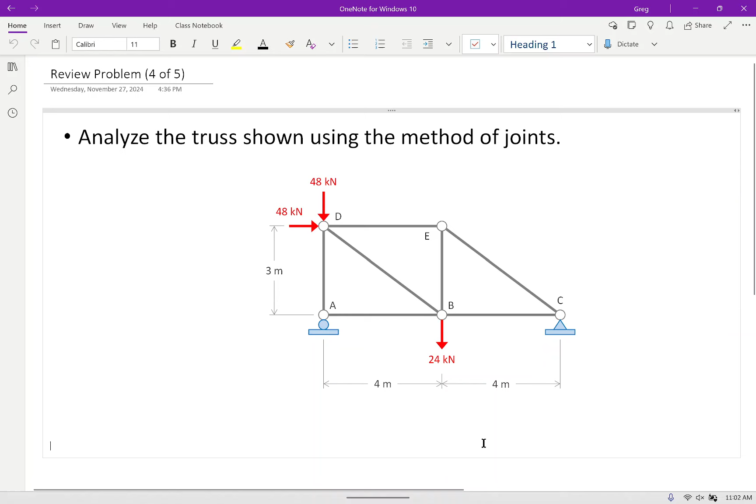So this is problem number 4. We've already done the first 3. Any questions about the last 3 problems? We had the particle statics problem, we had the centroid, and between that we had the big 3D cross product problem. Sound good?

Okay, so with this problem we have a truss. I picked this truss because it's a pretty standard truss, but there is one result that is kind of interesting, so I want to make sure we're all on the same page. I have the truss here on the board as well. I want to make sure we're clear on strategy. I did tell you to solve the truss using the method of joints with this problem, but let's make sure we understand our strategy.

What is the first thing that we need to do in this problem? Reactions, exactly right. We've got to solve for the support reactions, because we have to solve for every member, right? So we're going to need them. And then the second part after that is the method of joints. Now, we're going to come back to this in terms of what is our order of solution, but for now, everybody should recognize that we need to solve for the reactions first.

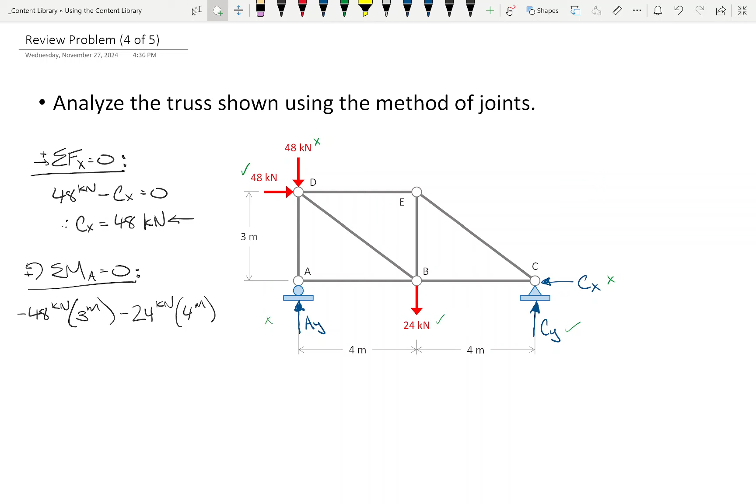Maybe what I'll do, let me move this down a little bit. And then we're going to have CY times what? I don't know why I drew those as exponents, but I'm just sort of going with it. All right, so we have 48 times 3. Let's see, 48 times 3, that's 120 and 24, or 144. Minus 144. Minus 96 plus CY times 8 is 0. So that's going to be CY times 8 meters equals what? So 144 and 96, that's going to be what? 240. And so we're going to get that, right? So there's that.

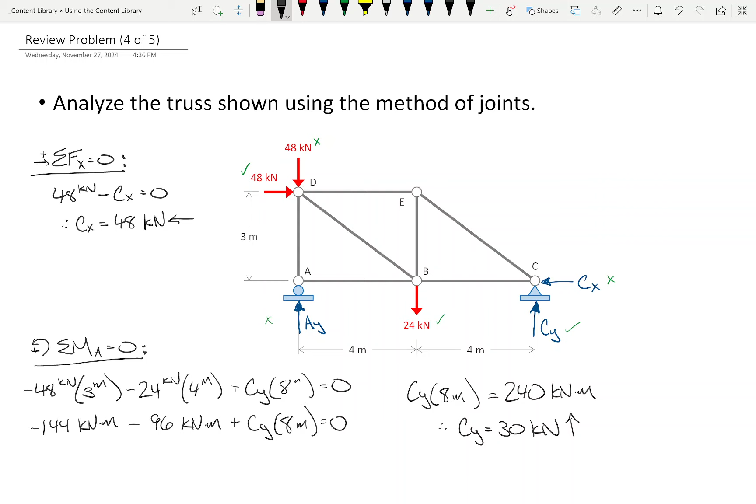So what's the last thing left to do? Solve for AY by summing forces in the Y direction. So what do we got? We've got AY going up, 24 going down, CY going up, 48 going down. So we'll say AY plus CY minus 24 minus 48. And so that's AY plus 30 minus 72. So that's going to be AY minus 42. And so, bam, bam, bam. And so this is 42.

Okay. I want to be clear, this part right here, I actually want to take a second and take a breath. Is there any part about this that was confusing? Because we're going to do reactions again on the next problem. And in fact, the computation of support reactions is one of the most ubiquitous topics in statics. So if you have a problem or there's something that you didn't understand here, this is the time to ask, okay? Because we are going to be doing this part quite a bit. Yes?

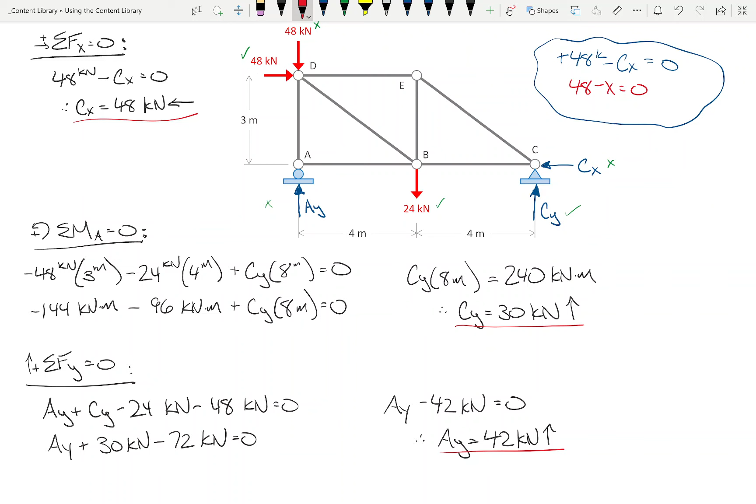Everybody good? This is good stuff, so don't hesitate if you have any questions. Okay. All right. So now what we need to do is solve this structure using the method of joints. Now, let's look here at the board. So obviously, I'm going to start with joint B, right?

That was a joke. Why would I not start my problem with joint B? There are too many unknowns. I cannot analyze a joint that has more than two unknowns. So a question would be, give me a joint that we ought to start this problem with. Well, hold on. How many unknowns do we have going through D? 1, 2, 3. We have 3 members going through D. So we could start with joint C.

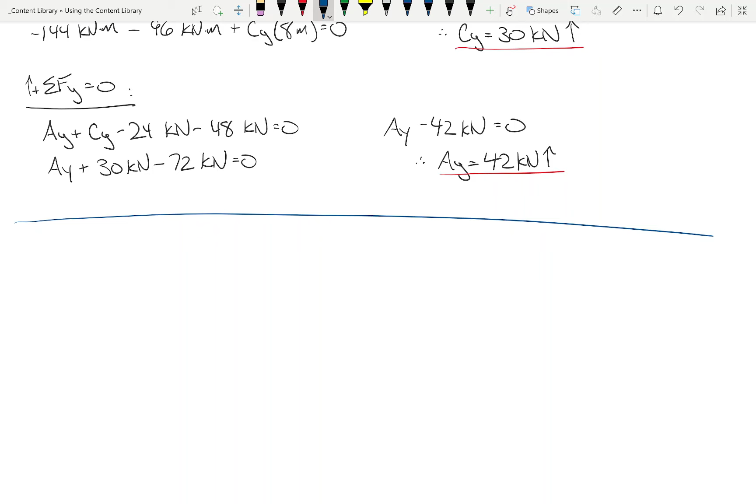What's another joint that we could start with? A, right? We can do joint C. We can do joint A. So what I'm going to do is say that we could start with C or A. I'm going to do C first, then A. I want to be clear that you could do either one in either order. It wouldn't matter. I'm doing C first and A because I have a point I want to make to you all. But it doesn't matter. So let's do joint C first.

By the way, for this truss, the diagonals are all at a 3 to 4 slope ratio? All the diagonals are 4 up 3, right? So all the diagonals are going to be 5, 4, and 3. The big thing to point out is the horizontal component is the bigger component. When we're dealing with the X and Y components, the horizontal component's bigger. Everybody okay with that? Okay. All right, so let's do joint C.

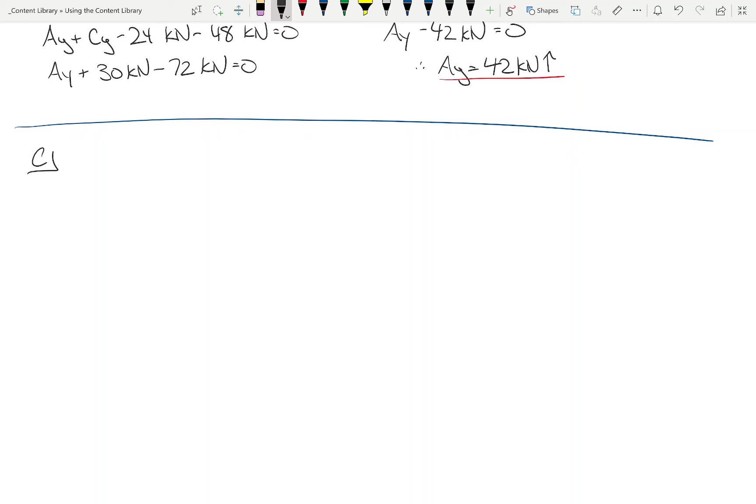So what do I do with joint C? The first thing I do is draw the members. The next thing I do is put my slope ratios down here. The next thing I do is list my reactions, which is why I wanted to put this here on the board so I wouldn't have to scroll up and down. I have 30 kilonewtons and I have 48 kilonewtons.

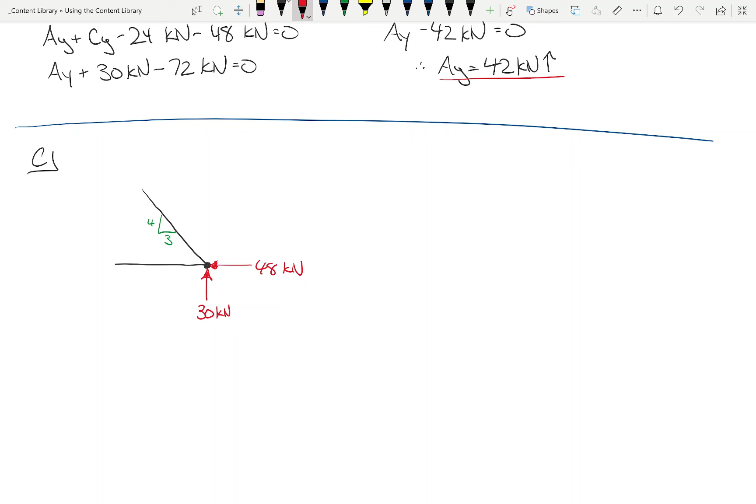Now, how many unknowns do I have now? Yes? Is the slope ratio supposed to be 4? Oh, you're right. Thank you. So we're going to have 2 unknowns over here for the diagonal, 1 unknown here. Okay? So let's name these. Let's call this BC. Let's call this CEY, CEX. So let's just see if we can do this.

All right, first off, before I go down the rabbit hole, is everybody comfortable with what I have here on the screen, and able to construct this on your own? Notice the systematic process. Look at what I did. I started off with the members. This is joint C, member, member. Slope ratios, 3 and 4. Next, what are the loads that are already on the joint? Here and here. And then the next thing I did is my unknowns. This is a horizontal, this has 1, a diagonal has 2. That's it. Is everybody okay with that?

All right, so now let's do some figuring. How many horizontal unknowns do I have? 2. How many vertical unknowns do I have? 1. So let's keep this real simple. What is the vertical one got to be? 30. 30 going down. If that's 30, what's the horizontal? Would that be 24 apiece? No.

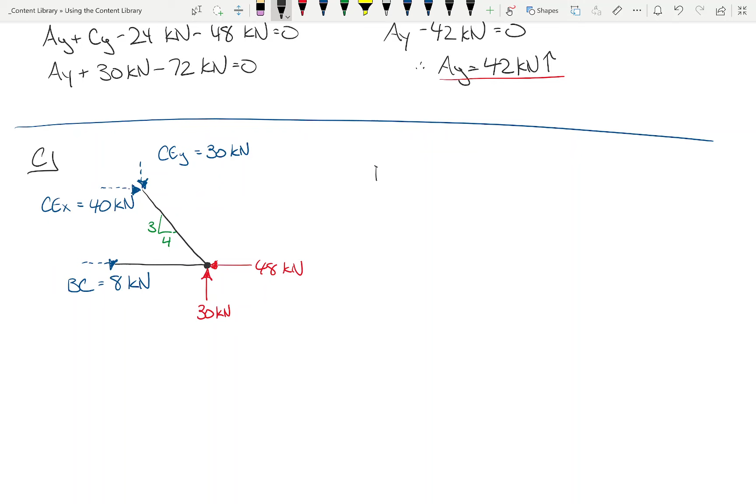So BC is 8 kilonewtons, and CE, how am I going to get CE? I'm going to use the Pythagorean theorem. When I use the Pythagorean theorem with 30 and 40, what am I going to get? 50.

Now, can somebody tell me about the direction of these forces? When I say direction, I mean like tension or compression. Compression, which one? Both of them are compression, right? Because both of the sets of arrows are all facing toward the joint. Is everybody okay with that? Is everybody okay with the fact that when I got this one vertical, I immediately put that one down, that one to the left? Everybody okay with that? So this is compression, this is compression.

So up here on my little diagram up here, that's what I'm going to do.

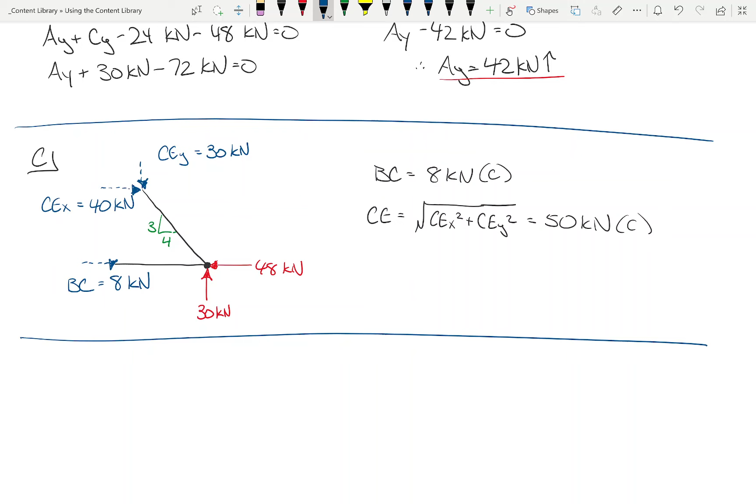All right, I want to take a breath and make sure we're all understanding what's going on, because I don't want to just barrel through this without y'all understanding it. Everybody good? Now, what was our plan? What do I do next? That was the plan, okay? This is important whenever you're doing these types of problems, is make sure you have a plan and go with it, okay? So now this is the joint that I said was going to have a weird, somewhat strange answer.

Okay, so again, everybody watch up here with me. So this is what I'm going to do. How many members do I have going through A? 2. I have a vertical and a horizontal. Do I have any diagonals? Do I have any loads that are applied directly to joint A? Exactly. I have a reaction of 42 kilonewtons. I am going to have an unknown in this member and an unknown in this member. So let's name them. Let's call this AD. Let's call this AB. Okay?

Let's deal with the verticals first. So if I have 42 going up, what does AD have to be? Going down. So this is 42 going down. And by the way, if I were to make a conclusion about member AD, is it tension or compression? Because it's towards the joint. So this is 42 kilonewtons in compression. But like I said, member AB is going to have a strange answer.

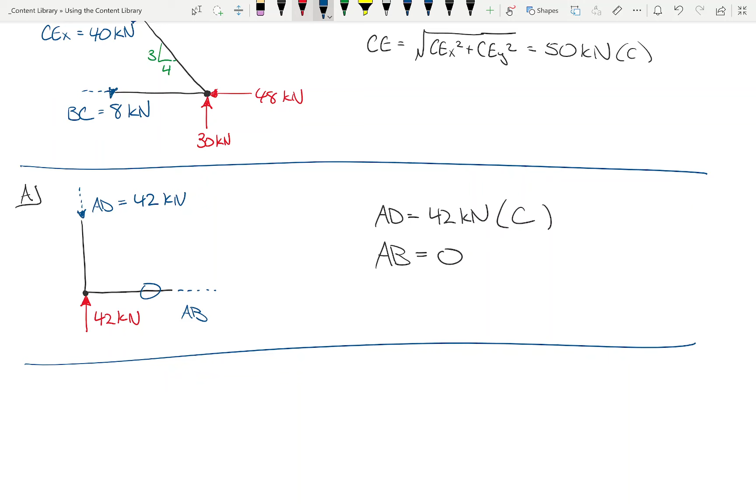I'm going to start knocking out the rest of this truss pretty quickly, if that's okay. What I'm going to suggest for moving forward is that we do joint E next. Now, why am I saying joint E? Well, joint E has 1, 2, 3 members, but we already know one of them, right? Okay. And then we're going to do joint B. And then afterwards, the truss is done. Okay. So I'm going to knock this out pretty quickly because I want to have some time for our final problem. So if we look at joint E,

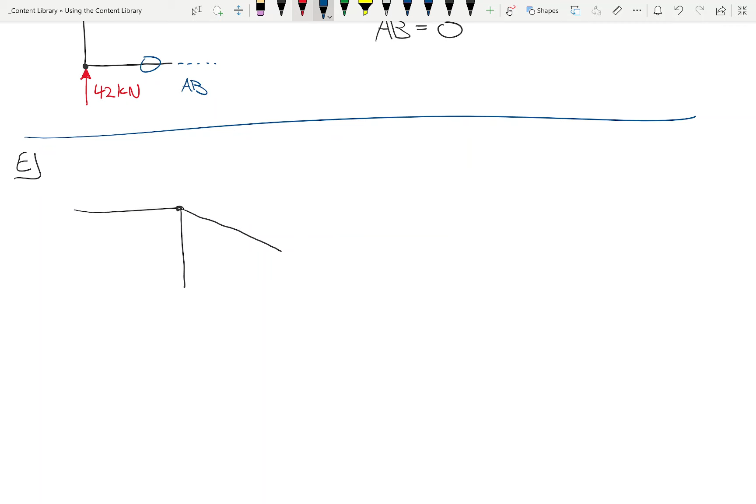so joint E looks like this and that. Are there any external loads applied to joint E? No, it's just the joint. But here's the thing. We already know the force inside this member. Right? Because remember, this is a 4 to 3 member, and we got this. Where did I get this, by the way? Where did I get the 30 and 40? From joint C. We had already done joint C, right?

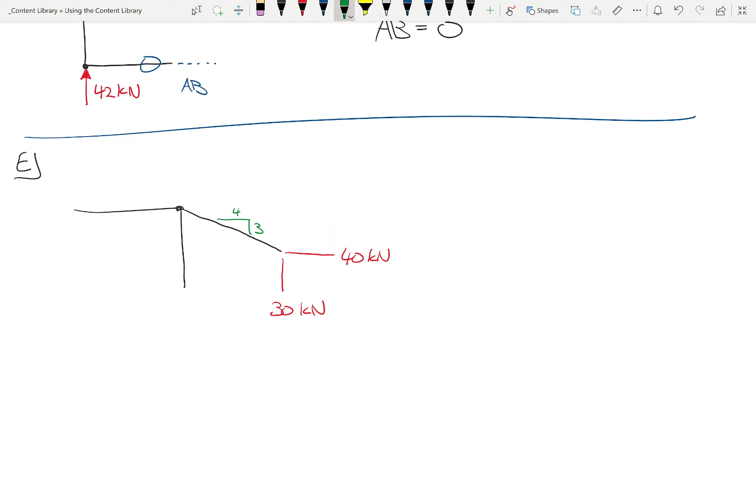Now, what I need to know is what direction do I draw the arrow? Which direction does the 30 kilonewton go? Up. Which direction does this go? Left. Why is it going up and to the left? It's going up and to the left because the member is in compression. Compressive forces face the joint. Okay? So, how do we deal with equilibrium? How many unknowns do we have? A vertical and a horizontal.

Okay? So this is going to have a single vertical component, single horizontal. We're going to name these. Let's call that BE. Let's call this DE. What is BE going to be? 30 kilonewton down. What is DE going to be? It'll be 40. And it's going to go like that, right? Make sense?

So that means that this is 40 in compression. This is 30 in tension. This is our first tensile member. There's a lot of compression members in this truss. But what's happening is a lot of the loads are sort of serving to push on the members. That's just what's happening. If we were to change the direction on some of these loads, it might change the answer.

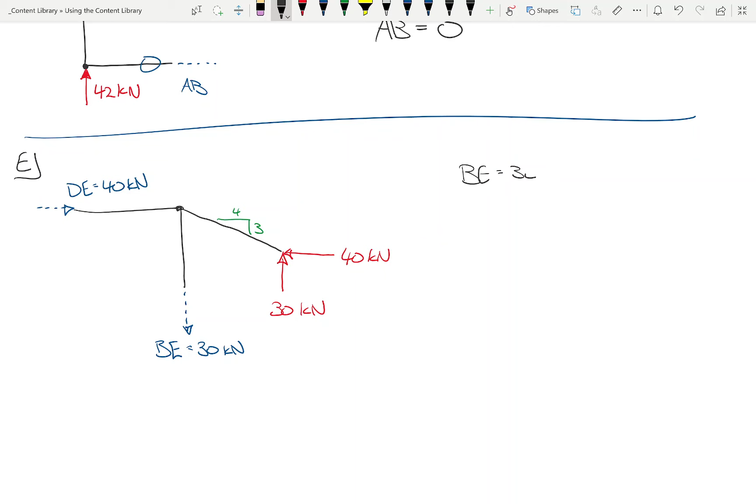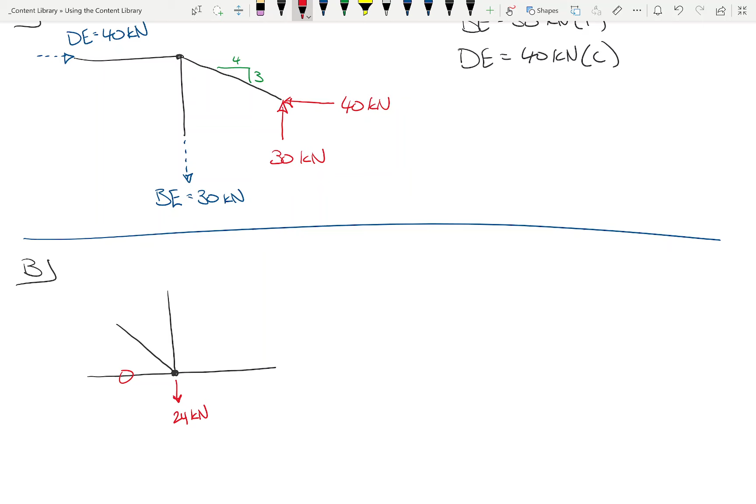And then lastly, we have joint B. Okay? So as you start getting further along in the truss analysis, it becomes a bookkeeping problem more than it becomes anything else. Okay? So there's the joint. Here's joint B, horizontal, horizontal, vertical, diagonal. Let's write the forces that we know. So this horizontal member here on the left, that's a zero force member. There's nothing going on in that member. Okay. This one is that, so that's 8 kilonewtons in compression. This vertical one is this, that's 30 kilonewtons in tension.

And so the only thing we have left is this and this. Okay. So here's the cool part. Let's just handle each one separately. What's the horizontal component got to be? No, the horizontal. 8, because this is 8 this way, so it's going to be 8 that way. So this is 8. What about the vertical? 6, right? Which direction? Down, because there's 30 up, but there's only 24 down. So there needs to be another 6 going down.

And by the way, what's the slope ratio on this member? 3 to 4, right? So does this 6 kilonewtons and 8 kilonewtons comport with this 3 to 4 slope ratio? Yes, it does, right? Because 3 is to 4 is 6 is to 8. Both values independently satisfy the slope ratio, and both values independently pointed the right way. So this is going to be BDY. And that's BDX. So BD. Now the question for you, and for the class, is that tension or compression? Compression.

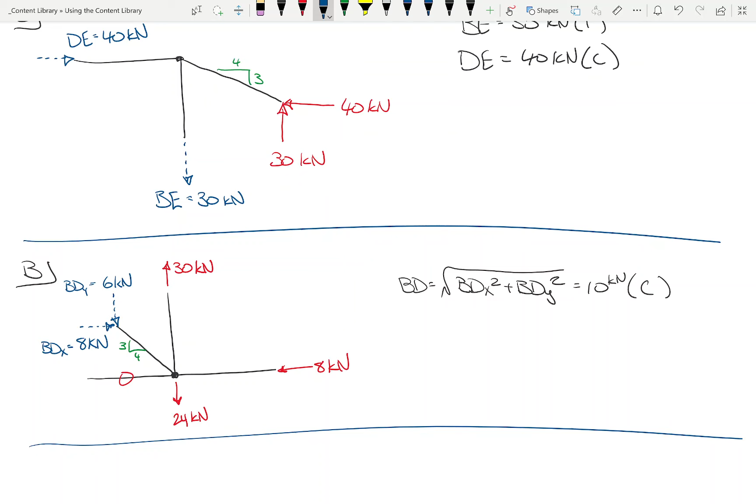Okay. All right, I want to give a little bit of time for our next and final problem, but before I do, does anybody have any questions? Okay. I think if I had to pick, this last one was my favorite problem to develop for this whole exercise.

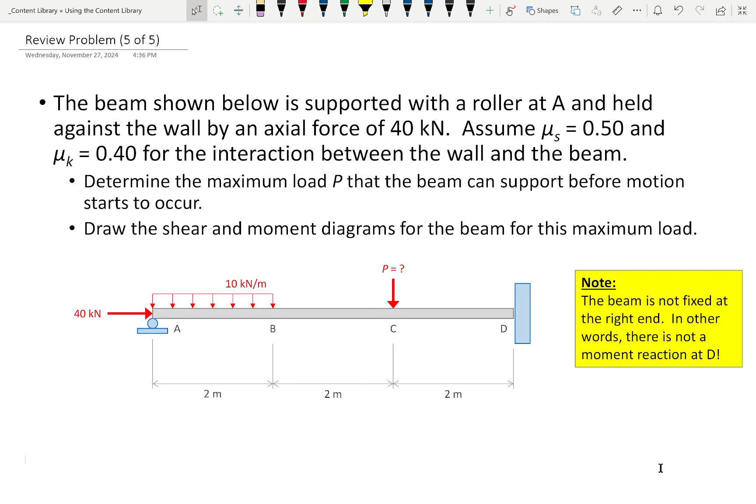Okay. So let's see if we can digest what's going on with this problem. I have here a beam that is being shoved up against a wall and it's being held in place on the wall by an axial force of 40 kilonewtons. I'm giving you some coefficients of friction for the interaction between the wall and the beam. I want to determine the maximum load that the beam can support before motion starts to occur, and then I want to draw shear and moment diagrams.

Okay. All right, so the big thing I want to point out is that the beam is not fixed over here at the right end. What's happening is, like this eraser is the beam, and I've got this 40 kilonewton load here that is pushing the beam on the wall. So what's happening here at the wall? If I take a 40 kilonewton load and it pushes against the wall right here, the wall's going to respond with a force like that, right?

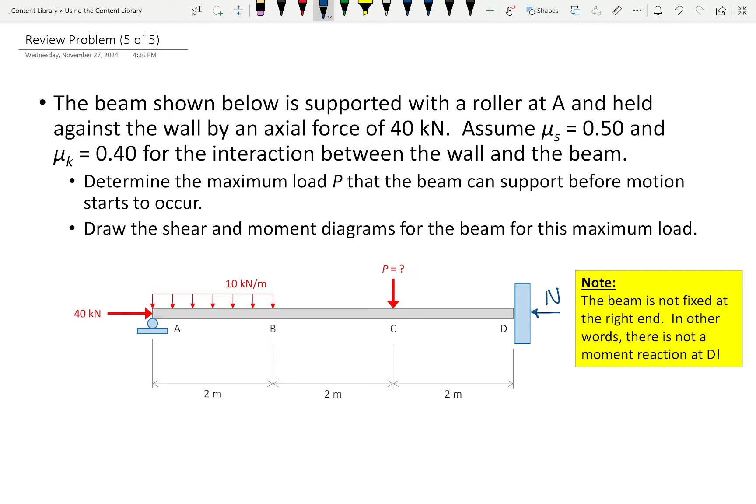Now what do you think we ought to name that force? We could call it Dx if you wanted, but I have a better name for that force. And I want to think about friction. That's the normal force, right? This is the normal force that the wall is going to respond with. And so if I were to sum forces, that's that.

Now, let's think about what's happening here. So, let's envision what's happening here. Here's the wall, and I'm pushing this against the wall, right? So I'm getting a normal force in response. And then I'm loading it this way, right? Now, if I'm loading it this way, the beam wants to slide down the wall, right? What's going to act against it?

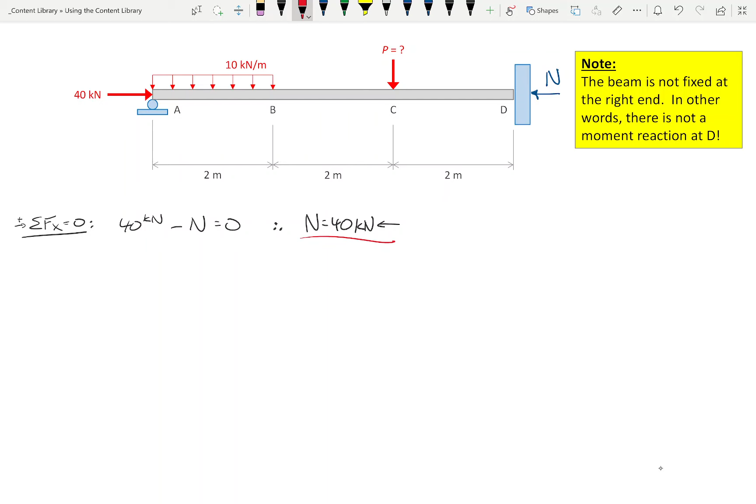Friction, right? So what I'm getting at is I've got a vertical reaction right here. Now I could call that reaction Dy, but I have a better name for that reaction. I'm going to call that reaction the resistive force, the frictional resistive force. That beam wants to slide down the wall, and that interaction between the beam and the wall is saying, I'm not going to let that happen. So I've got some friction trying to keep the beam up.

Now, what did the problem say? The problem said figure out what the maximum loads need to be before the beam starts to move. So how do I figure out what the maximum friction force can be before the beam starts to move? I would say I need to figure out this. And how do I calculate the F sub m? Remember, F sub m for friction, that is the force at which motion occurs. How do I do that? Mu sub s times the normal force, the coefficient of static friction times the normal force, right?

So what I'm saying is, under a normal force of 40 kilonewtons and a coefficient of static friction of 0.5, I have figured out what that reaction is. Does that make sense? If I push up against this beam and wall with a force of 40 kilonewtons and the coefficient of friction is 0.5, then it takes 20 kilonewtons before that beam starts moving, right? Does that make sense? Now, some of you are like, okay, but I don't see where the problem's going.

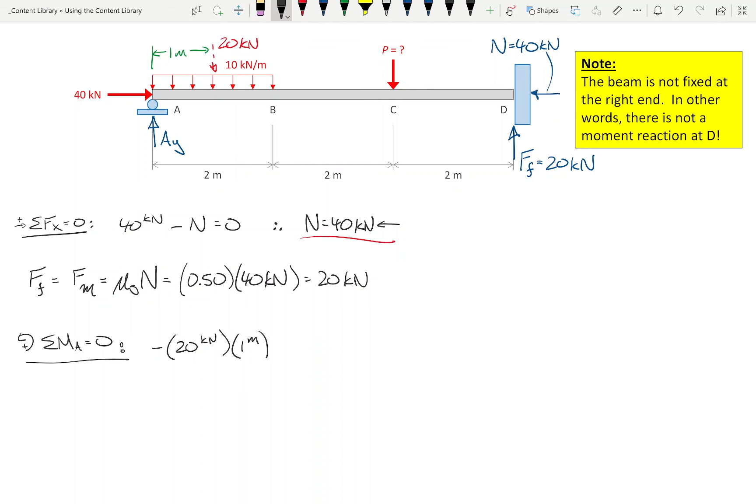Okay, what about the P? Does the P generate moment at A? At a moment arm of? Four meters, right? From A, right? It's 4 meters, not 2. All right, what about the N? Does the N generate moment at A? Goes right through A. What about the friction force? So we have a 40, which is going to be positive, times a moment arm of what? Oh, you're right, it's 20. That's going to equal 0, right?

Does that make sense? What's my unknown? P. So, let's see. Did I get the signs right? Yes, I did. So if I add the P over to the other side of the equal sign, I get 120 minus 20, or 100.

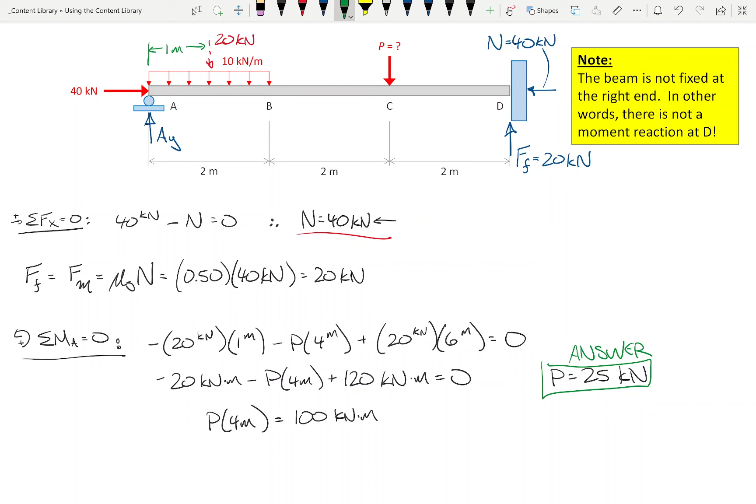And what did the problem say? The problem said figure out what load will cause motion to occur, right? Think about this. What would happen if P is a little bit larger? If P is a little bit larger, then F sub F has to be a little bit larger to keep the beam in equilibrium. But that's not possible because that is the maximum amount of force that we can generate there before motion starts to occur. Does that make sense? We can't get any more. So that's the answer. Then what's left to do is to draw the shear and moment diagram.

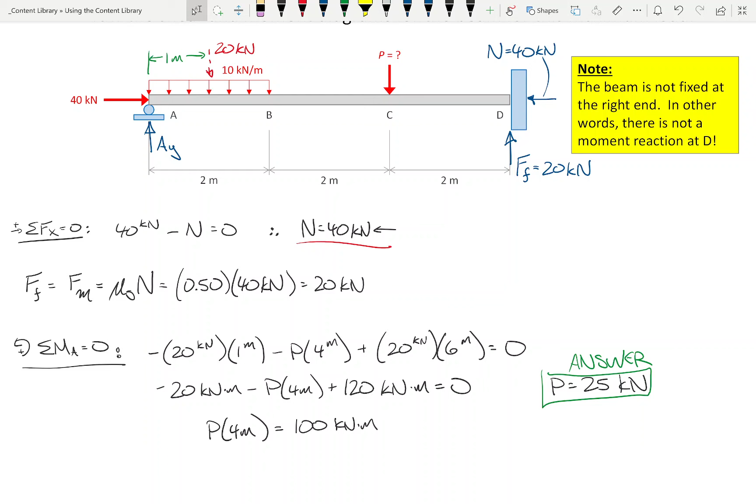So I ask you, if I want to draw the shear and moment diagram, how do I do that? Well, what do I need to do? I need AY. I need to get my other reaction. So I need to sum forces in the y direction. So I've got AY going up. I've got FF going up. Are you counting the distributed load in this? Oh, no, I am, yes.

And then, so these are the forces going up. What's going down? I've got the 20 kilonewtons, and I've got P going down, right? That's what I've got going up. That's what I've got going down. The 20s are going to cancel, okay? And what am I going to get? AY minus P equals 0, so what's AY? 25 kilonewtons going up. Okay. Does that make sense?

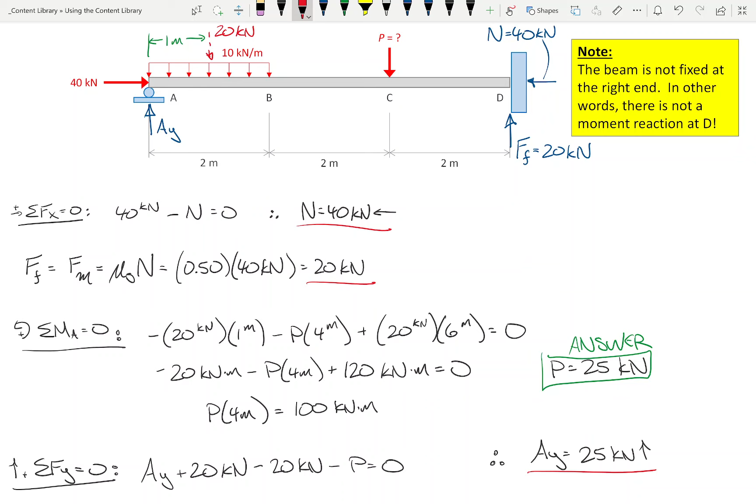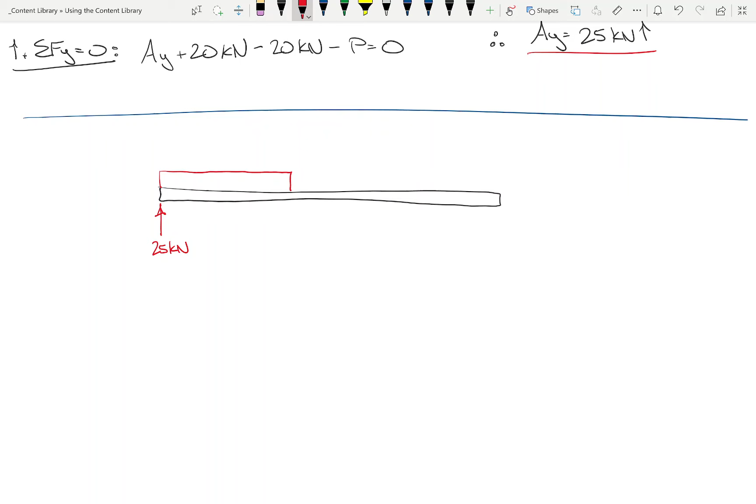So, can I scroll up a little bit to give myself a little bit more space? So, if I were to redraw this beam, here's the beam. There's that. There's that. There's that. There's that. And then these are all 2 meters.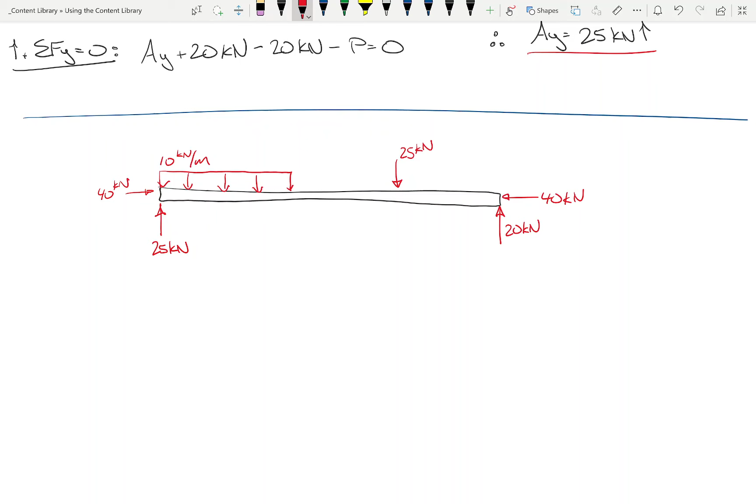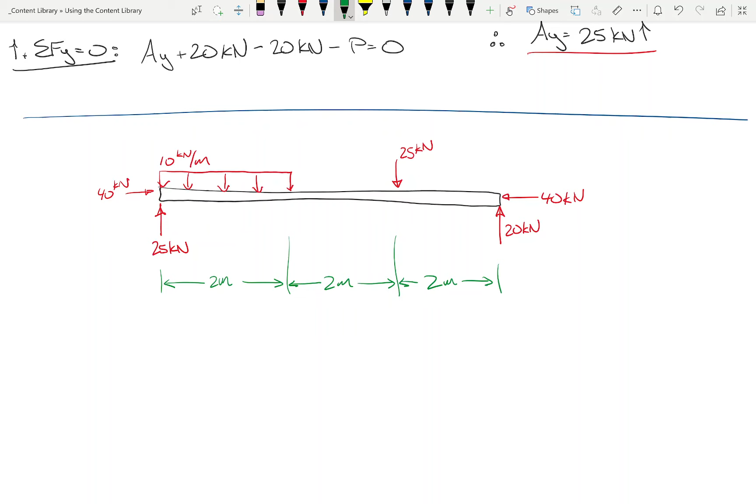Let me ask you a question. Do these 40 kilonewton loads matter at all on the shear moment diagram? No. The shear diagram is a change of vertical load. So these 40 kilonewtons, to be honest, we can kind of ignore them. So what does the shear diagram look like? And I'm going to do this really fast because we're running short on time.

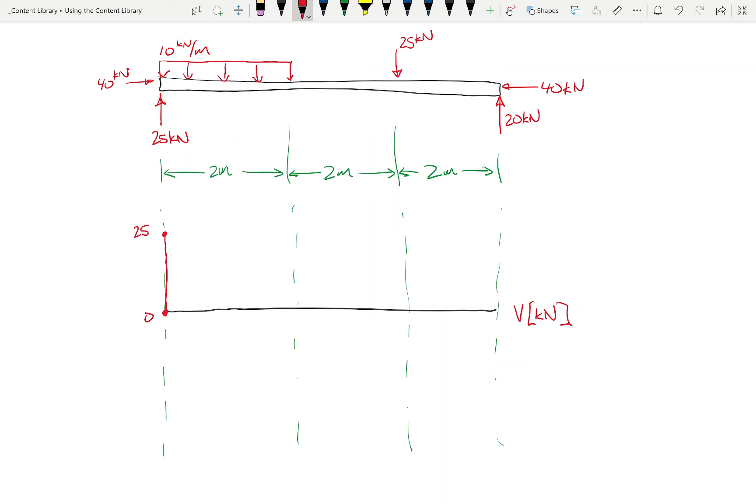Okay, so what do we do? We start at 0, and then we jump up to 25. And then what does the shear diagram look like from here to here? Diagonally down to a value of 5, right? Because that's a total of 20, right? No change. Drops down to minus 20. Brings back up to 0.

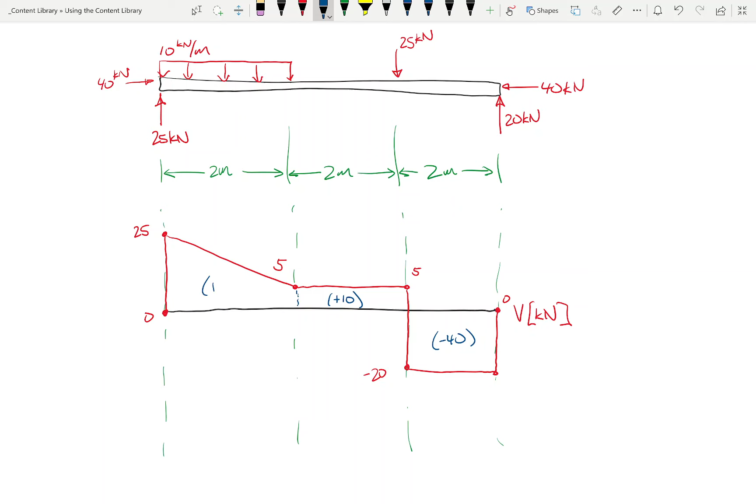Then we can do a little bit of integration. 20 times 2, this is going to be 40. So this right here is going to be minus 40. This part right here, that's going to be 5 times 2. That's going to be plus 10. And then over here, what we can do is we can say the average of 25 and 5 is 15. So 15 times 2 is 30, right? So this whole trapezoid area is going to be 30.

And then when we construct the moment diagram, we're going to start at 0. We're going to jump up to 30. We're going to jump up to 40. Then we're going to jump back down to 0. Between these two regions here on the right, it's going to be linear. And then on the left, it's going to be a quadratic, and it's going to open downward.

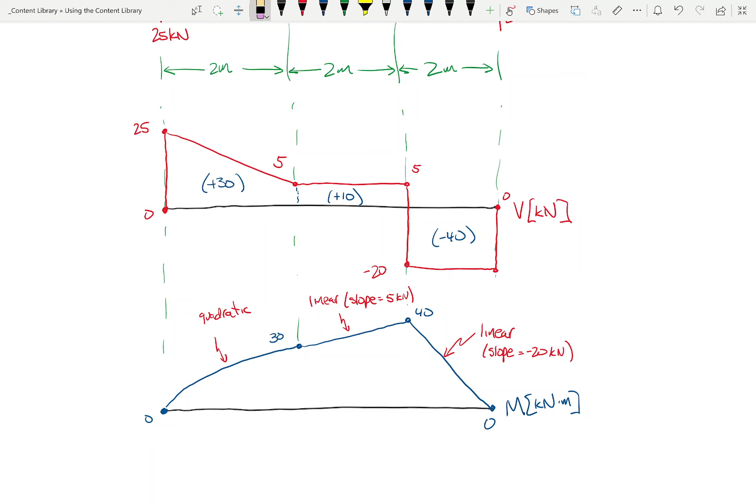So we're going to do like that. Let me do better than that. That, straight line, straight line. That's linear, linear. And this is quadratic. Whew, I did that kind of fast, I know. Does that make sense?

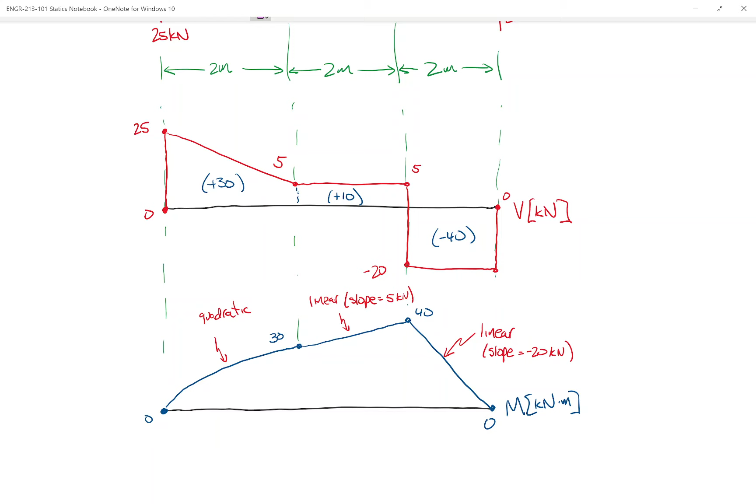Sorry, real quick, when you go from the 25 to 5, why did you do that again? Okay, so the reason I did that is because it's a distributed load. A constant load means a constant slope, right? So we drop down at a rate, so the slope of this line is minus 10 because the load is minus 10. And remember how much load is that? 20, right? 10 times 2 is 20. So you go from 25 to 5 in a linear fashion. Oh, okay. Yeah. So the slope of this line is negative 10 kilonewtons per meter.